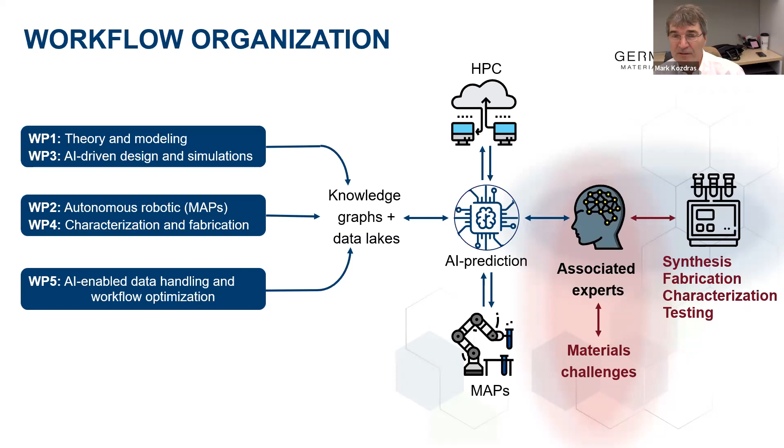Next slide, please. The areas of focus — I talked a bit about the hydrogen fuel cell related and electrolyzer related stuff. That's really where we're digging in.

Challenges 1 and 2 deal with materials, the electrocatalysts themselves, and the ionic media. We move into interfaces and electrodes, expanding to the importance of putting different materials together and how they perform together, then up to porous transport media. We see this come together to make a single device that might actually generate or produce hydrogen. So we're moving from materials to the device, and that's part of the entire area of focus within GCMAC.

Next slide, please. You can see the work packages are designed on the y-axis — work package 1, 2, 3 — and how it creates a bit of a matrix from the materials challenges themselves. There are interactive activities between these things in varying degrees of work, but most of the pillars have an impact on each of the work packages.

Where we're trying to get from those work packages is to scaled-up and integrated materials. We also want to go from the individual materials challenges to optimized in terms of specific descriptors. We're looking at how we convert conventional output from characterization on these materials into something that can be used in a computational-centric world.

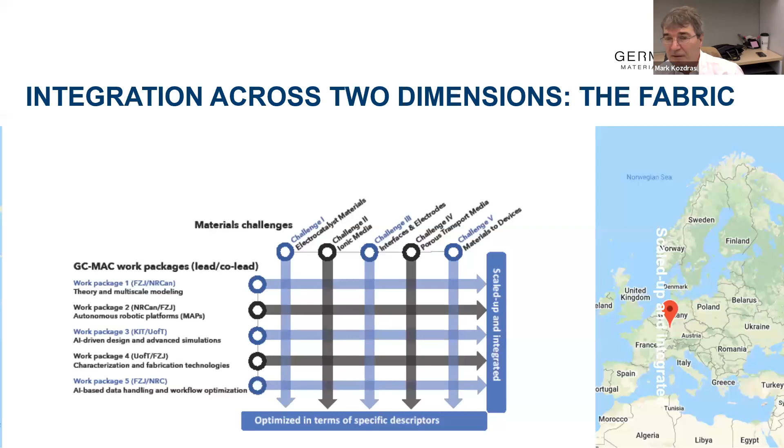Next slide, please. One thing that came up really early — this is a great graph from Michael Eikerling, the co-PI for GCMAC from Germany. He devised a scheme showing where we are in terms of applying AI-driven design and concepts on the x-axis, and then what are the socioeconomic impacts — which ones will actually drive us toward climate change mitigation and economic prosperity.

One reason governments fund these kinds of accelerated activities is because there's potential for economic prosperity from them. You can see a lot of the technologies we're working on. This isn't perfect, and people will disagree on where things fit, the importance, or the size of the bubble, but it doesn't matter — it gives us a map to say what kinds of things we could be working on that would be useful from an AI-driven design concept, provoking people to think about where it fits within their specific activity.

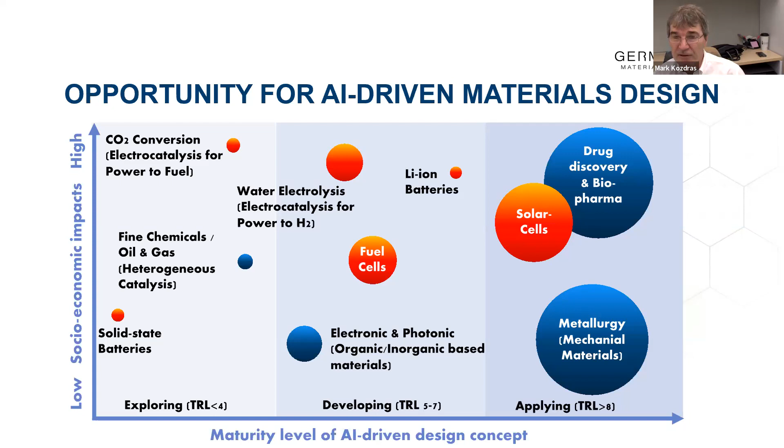The closing the loop concept is critically important for accelerated materials discovery. If you think of the current paradigm, the conventional science approach, we go through and develop an idea, we synthesize a material. We talked to some people who say they synthesize 2 to 3 variants of a material per year. It really struck us as important that we need to accelerate that kind of activity.

The device construction takes further time. The testing and characterization requires moving samples from lab to lab where the equipment is, and that paradigm has to shift. Closing the loop allows us to predict and screen materials we want to work on, then put a smaller set of materials into a loop that allows us to synthesize, characterize, learn, and repredict the next experimental plan. Some of the things we do is look at massive experimental spaces.

We learned that yesterday in the talks that came up. But it has to be emphasized that we're trying to look at experimental space that we wouldn't normally tackle in a conventional science manner.

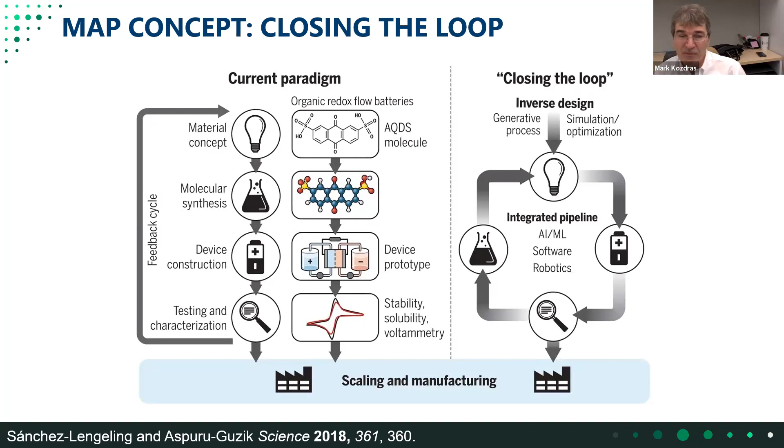What are MAPS? We definitely have the AI core that we build up on. We have computation and robotic automation, which is very important, and then closing the loop. The human in the loop is one of the important things—that expert guiding the design of the initial campaigns, these large experimental spaces, is critically important. So we're not taking the human out of the loop, we're putting the human in the loop to constrain the robotic platform to function at its peak.

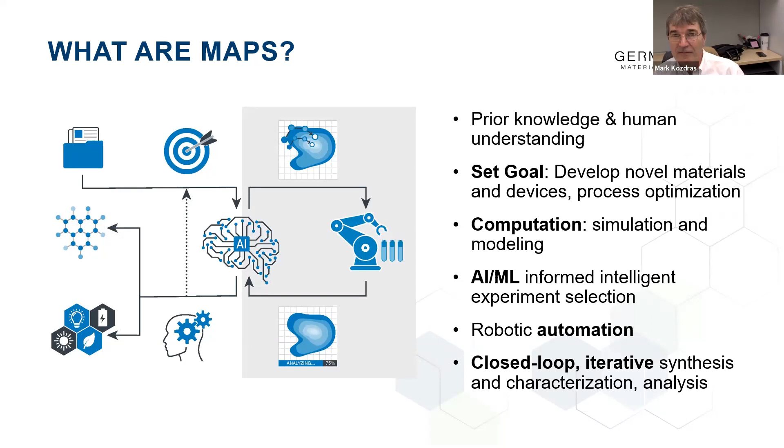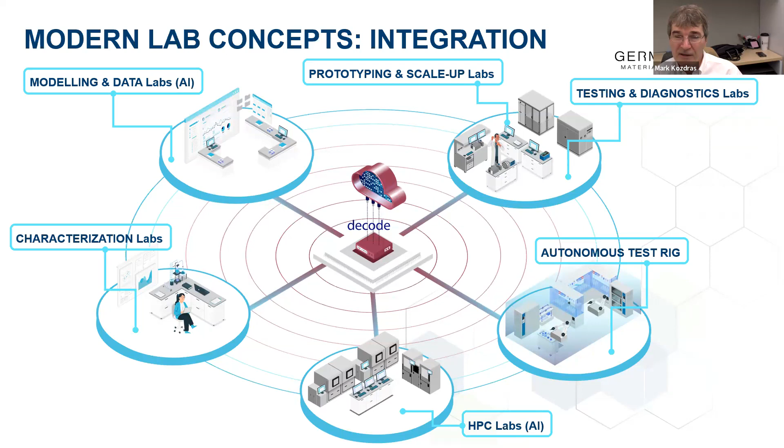If you look at some of the conventional approaches, we might do modeling in one lab, prototyping in another, some autonomous test rigs. Maybe there's high throughput characterization and synthesis happening, but it's largely done in individual labs. When we move to the model we're looking at, we're collecting and connecting all of this, and it's really important that we have means to deal with that.

Thank you very much, Mark, for your introductory remarks and for presenting very well what is the scope and activities within GCMAC. I will continue the story. The last slide already introduced one aspect of the discussion we're going to have today about integration—looking at lab-to-lab integration, basically. Labs with different capabilities, different instrumentation, different analytical abilities must be integrated and coordinated to draw the best possible value out of that existing infrastructure.

There are different aspects to that integration theme—scale to scale, component to component integration. What I always liked very much about the field of electrochemistry was that it has influences from many different areas: fundamental physics, chemistry, of course, material science, and a lot of engineering. Each of these is very essential to the developments we have to make in hydrogen technologies and other technologies like energy storage and batteries.

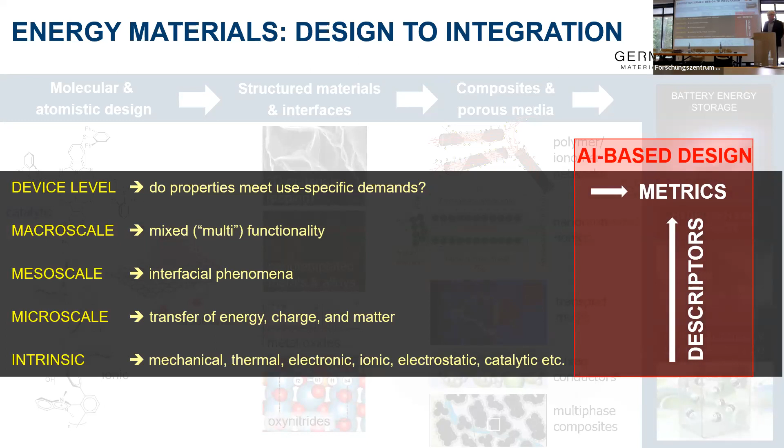So that's basically the integration that needs to happen. Now I want to show you something, we have been dealing a lot with fuel cells. Of course, one may analyze different technologies, for instance perform an analysis for battery technologies, for water electrolysis, and so on, whatever is in our interest.

So we have a very good understanding of what determines the mass activity, and we know that mass activity is a very good metric for the performance of a fuel cell. It tells us what is the current generated at a certain potential at a certain time—let's say the fresh cell, the cell after some use, so that would be reflected in the time—divided by the initial loading of platinum. So this is cost. This is performance divided by cost, so that is a good descriptor.

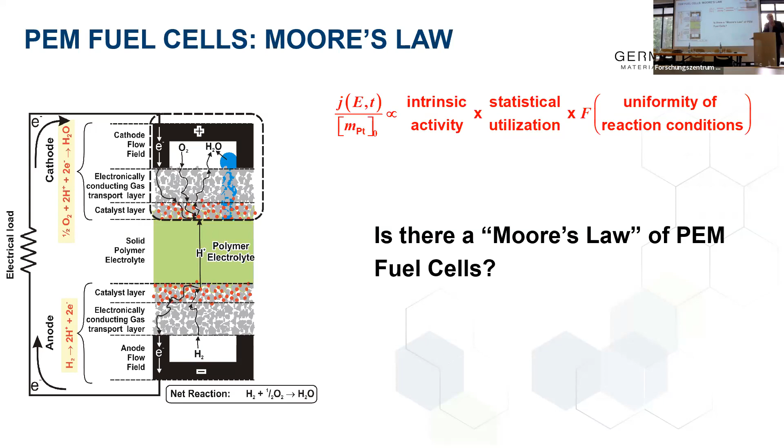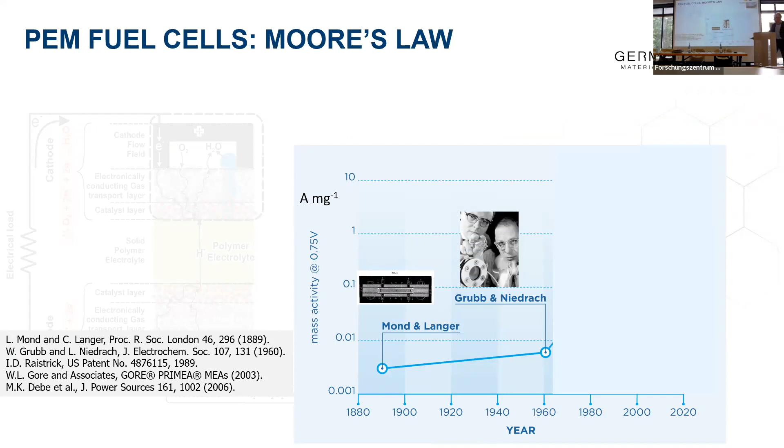And we can take a look at how that has evolved over time, over a time scale of more than 100 years. The invention of fuel cells goes back even further, but there was a first practical cell around the 1890s. Then there was not a lot of development, not a lot of progress. There was a major breakthrough here—I will tell you later what that was. And from then on, the development has been very rapid.

What people might not be aware of is there's kind of a 10 to 3, so 3 orders of magnitude increase in this metric. And all of this was not achieved in a very orchestrated way with a lot of involvement from industry. No, all of this has been achieved with academic research, academically driven research supported with public funds. So imagine how much more rapid this might have been if industry had that commercial interest in the technology from the beginning, as it had, for instance, in computing.

So 10 to 3 increase—what has driven that? Well, you might think there's an issue with the electrocatalyst material, because electrocatalysis is what we must accelerate, right? So that has to get better with less platinum, since platinum is a major cost issue. But actually none of this has been due to the replacement of platinum—it was achieved with platinum.

The major breakthrough was that polymer electrolytes were introduced as the electrolyte medium—membranes like a plastic bag with some ionic functionality in them—making these cells much higher performance. Then there's been some progress in catalyst layer design, designing the media around the catalyst, not the catalyst itself. And then some optimization of nanostructures—small is good because it gives higher mass activity in this case—and some optimization of the engineering. So that has contributed. The 10 to 3 increase came from a variety of contributing factors.

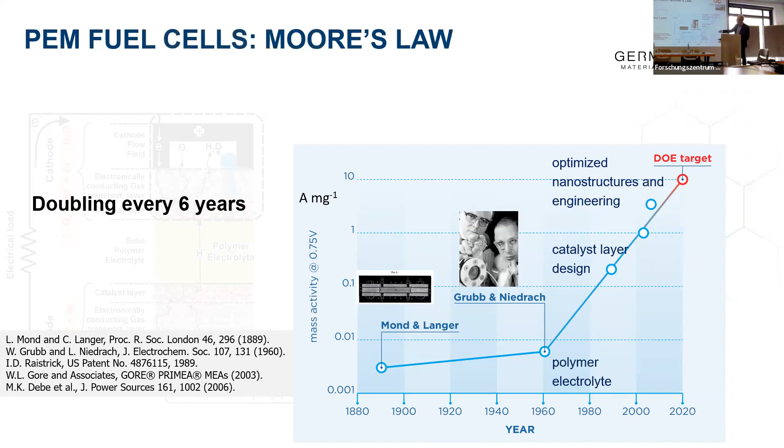So this has to be achieved in a shorter time, and the acceleration needed is indicated here. I mentioned this was doubling every 6 years—it's an exponential law, as shown here on the logarithmic scale, spanning 3 orders of magnitude. If we want to achieve this goal faster, we have to make this doubling happen every 2 years. That's where the acceleration will be needed.

So we have to see where that acceleration could come from. Maybe we continue with the platinum-based catalyst, or maybe we look at other ways to achieve performance increases—they might come from these different areas indicated here. That's something we'll have to see, but everything here we need to have on the radar.

We cannot neglect certain scales and just focus on one particular aspect. The catalyst is important, the ionomer material or media are important, the design of complex electrodes is important, integrating everything into a well-functioning cell and optimizing the engineering problem—all of this has to come together.

It's not enough to be very good at making better catalysts. Once we scale it up and make an MEA, some of these improvements will be lost. Going from the MEA—the functional unit with all the properties of a working cell—to the stack, which is essentially the end of the technology's development, we might lose even further. So we have to be really good and selective here, to retain some of these improvements when we get to the real technology scale.

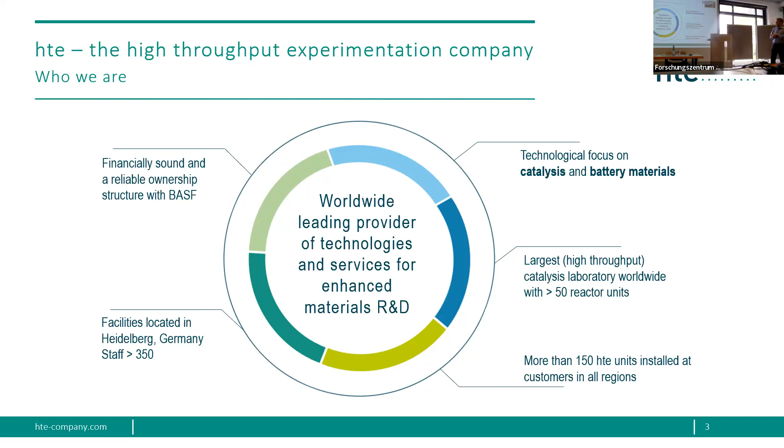What are we doing actually? We have two pillars. One is building high throughput experimentation or lab equipment - we build it for customers who buy this equipment and use it in the laboratory, or we build it for ourselves and do contract research in catalysis and materials R&D. So those are the two pillars. Also, if you buy things from us, we have operated them ourselves, so we know how they work - we typically call them turnkey ready systems because we know that they work.

The third pillar, kind of small, is the software part, which is essential for high throughput experimentation. In the early years, it was only to service the hardware as well as the contract research, but over the last years we see more and more interest in it itself, having its own selling point, and we'll see where this drives us.

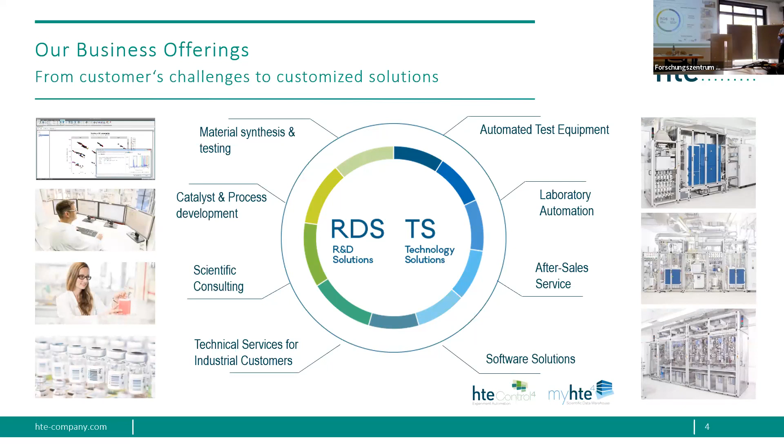The areas where we are active - the very classical one is heterogeneous catalysis, classical industry. Over the last years, however, we also realized we have the capability to look at different areas. One is battery materials, and the other is electrolysis. I will show you later why this one actually fits very well to us.

Let's have a look at battery materials. I have two case studies - battery materials and electrolysis - to give you an idea of how we think about high throughput experimentation on the material acceleration platform.

I have to say, we are a private company. That means we have to make revenue, we have to make profit in order to finance our developments and our growth. Otherwise, I think BASF would shut us down if we are not profitable.

So how do we think about battery materials? In general, our thinking always starts with workflows - you probably hear that every day in our facilities. That's the starting point, and with battery materials it's the same. Here's an example from cathode active materials, where we start at the synthesis part, then go to the thermal treatment part, to the post-treatment part, and then to the cell testing.

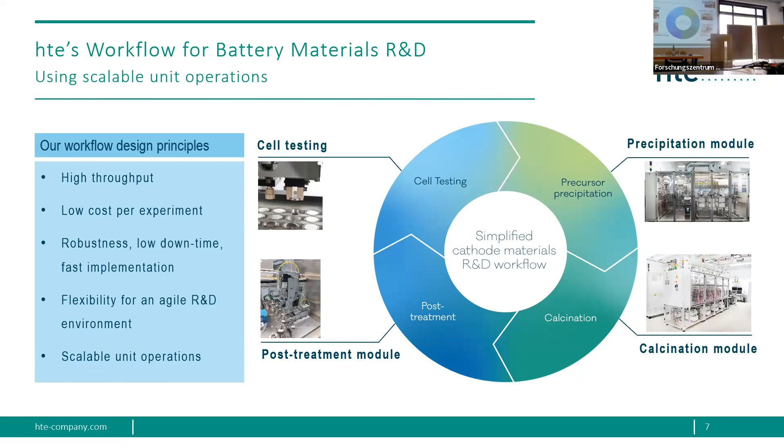So when we talk about this workflow, it's of course about high throughput, meaning how many samples do I generate with each step, and how many samples do I have to treat afterwards. It's kind of a funnel - it starts with a few samples, and since the parameters you can change, you want to investigate up the road with each step, so typically the number also increases in that direction.

The first thing starts with, in this example, synthesis and precipitation of active material. Here it's not necessarily about a very high degree of parallelization, so it's not about too many samples, it's more about scalability, meaning the samples we produce need to have some industrial relevance. That means they need to be comparable also when you go to industrial production. That's the most important part here.

But of course, automation and 24/7 operation is always something all our units are focusing on. Analytics, of course, where needed.

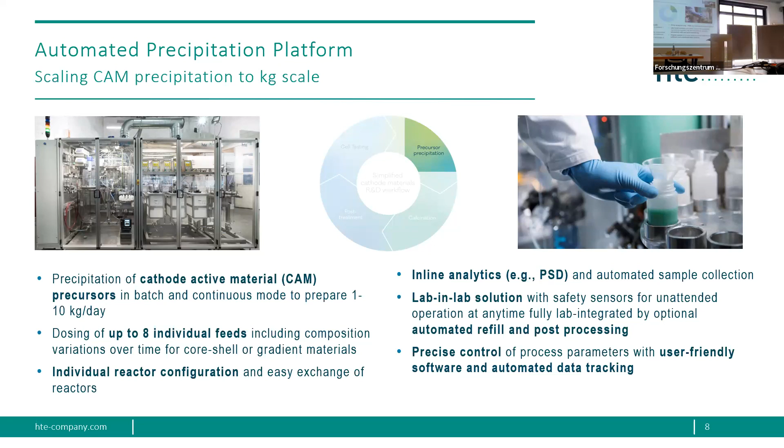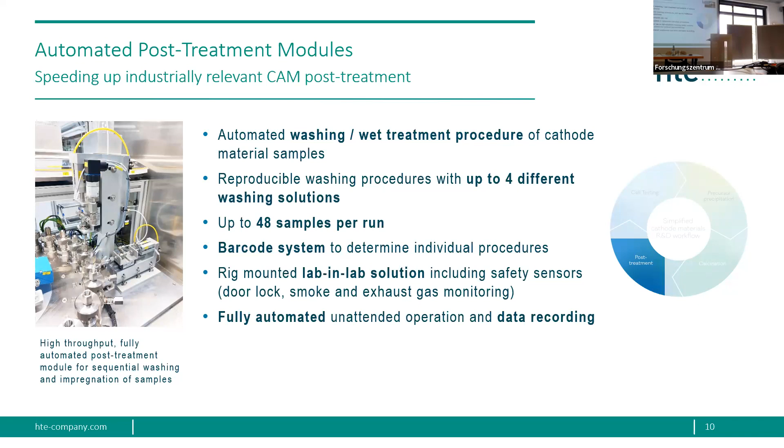The third step is then, with the number of samples increasing further, post-treatment of these samples. Here it's really about full automation and parallelization in order to cope with all the samples and the parameters that increase further. And the fourth step is then when you go to the cell testing of the material.

Here in the end, when we look at this cycle, it's the cycling, the number of channels that you have, that will be the limiting part. And then in the end it's often an economic situation or economic point—how many channels do we want to afford? It's about 1,000 channels, it's about 1 million, plus minus. And then also, how long do we want to cycle your systems?

So here it's about, when you go this way, you need to consider how many channels you have, how long your protocols are, and then you decide what you can do in the single steps. And then you decide which of these steps are maybe critical in the workflow, and that's where we typically go into automation. As I said before, we typically do not start with full automation of this at the very beginning.

Yeah, so that's kind of the thinking where we are in the battery field.

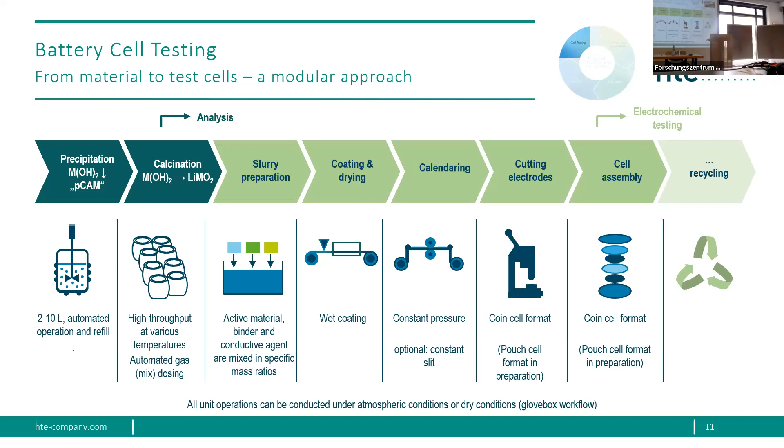Now, the second example is electrolysis. This is, of course, a very important topic, as we have heard. We realized we have to go into this topic because, let me just say, for the batteries, it was clearly the starting point was the asset for us, that's for sure.

In this electrolysis field, we looked at the typical high throughput equipment we build. It's very classic—you have an electrical cabinet, an analytic section, gas liquid supply. It's a lab solution typically, so you have ventilation, sensors, and so on. And the core thing, here you have the conversion unit—let's call it conversion module. And what is our typical way?

We use flow reactors, heterogeneous catalysis. That's kind of 20 years we're doing heterogeneous catalysis. We realized when you go to different conversion technologies like electrochemistry, where you have no tubes anymore, but cells, in the end, if you look from a generic point of view, the system that you need is more or less the same. Actually, we can take a lot of the stuff we've already learned here and what works well here. In the end, simplified, we just have to exchange the core part of it.

And that's kind of where we realized, point one, it fits our technology platform—so it's not that we start at zero, we have our level, we have 20 years of experience with this kind, and we just have to add this part here. The second thing is very important for us, and the third thing, with all the startups and all the announcements on what we need industry-wise, there is a lot of need for testing on the materials, as Michael just said. So that was kind of the motivation why we went in there. We had a good starting point, and it was an interesting field for us.

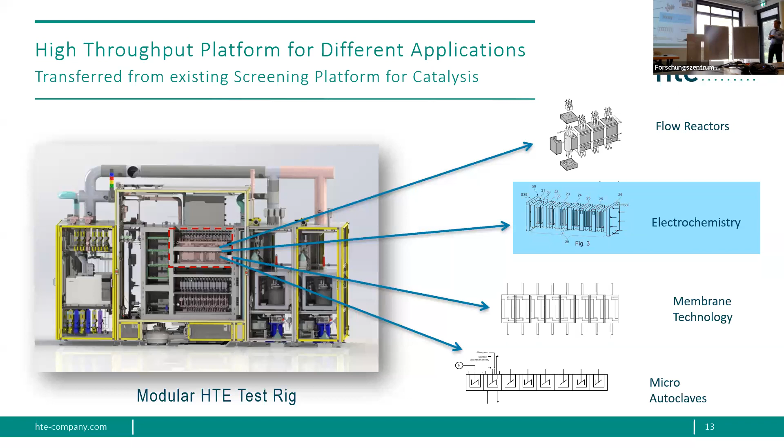So that's for the hardware part of it. Here's just a slide from Professor Eichel's group in Jülich. They did an estimation for themselves, bringing them to the point that they realized they need high throughput equipment for testing.

When you do simple material testing, catalyst testing, you can do it in a simpler way. However, if you want to go on the cell level, component level, and also now that this technology is being commercialized and brought into operation, we learn a lot of stuff. We need to include long-term testing, long-term studies. We need to compare materials at the cell level. So that's one point - a number of variables need to be tested, and the duration is increased.

From just a few hours to maybe long-term tests of 1,000 hours. When you have this in focus, you realize that the electrochemical part - the experiments, the planning, the synthesis, testing, evaluation - is by far the most repeated step from a timing point of view. So if you do it with single systems, it just takes too long. So here it's really about going parallel and doing automation in order to bring down this time.

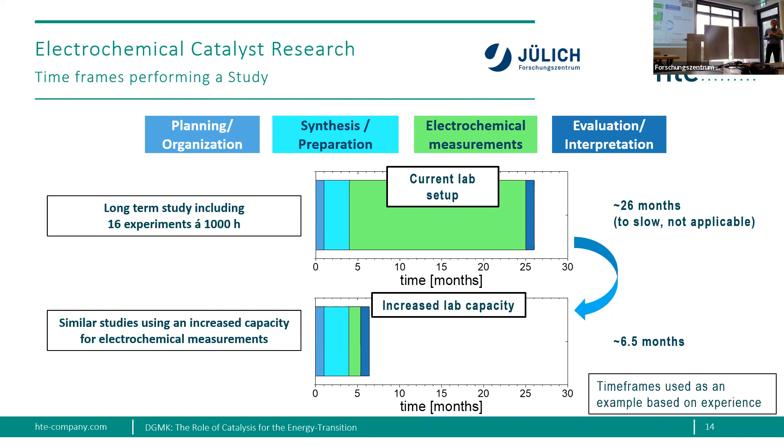This is an example of a 16-fold unit. So that's kind of the motivation. You could also say that's a business case for buying such a unit in the end.

This is how such a unit might look like. We are always thinking modular, as you've seen in the intro slide. We have certain modules that we combine into certain solutions, creating a customized solution. It's always more or less the same - the unit looks a little different from one another, but in principle, in how it's put together, it's always the same unit operation. That's what I call a modular construction kit.

Here's an example where you see it's actually a 16-fold unit. However, it's modularized, meaning it has 4 modules - 1, 2, 3, 4. Some are analytics, gas liquid, some gas conditioning, electrical cabinet - but in the end it's 4 of these modules with 4 cells each, and that can be combined in a flexible way.

I said before, the infrastructure around it we already know. The electrochemical cell is not our core competence, so as we heard yesterday, it's not always the best idea to reinvent the wheel, but just to look for people who can already do it. Here we work together with Fraunhofer. We realized the cells on the market do not fit our purpose, so we had to do our own design.

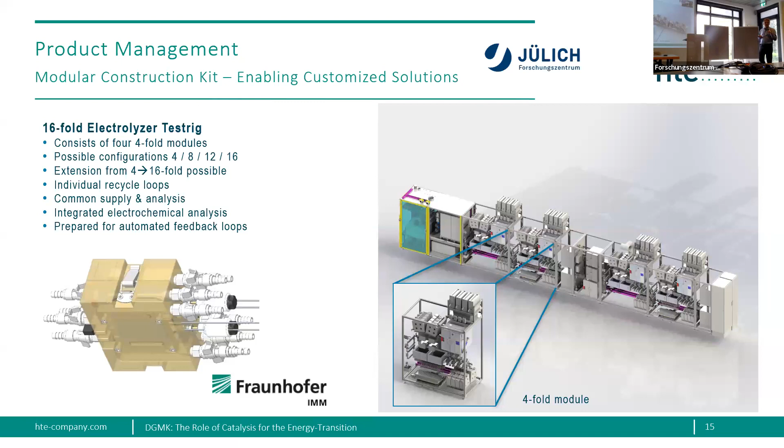A very important part for us is that this unit operates 24/7. So a critical part for us is software, the automation of these systems. Here again, we call it software workflow or data workflow. It's very important for us that we can control the unit in an automated way. That's a very classical recipe editor for the programming.

What was new for us, since electrochemical equipment was new for us going into this field, is that we worked together with Metrohm to integrate their software, the Nova software, into our software, so we can parameterize their software from ours. So as an operator, you just see our HTE Control, the unit control software, and we are controlling the Nova software underneath. That makes it quite easy for handling.

An important thing that I actually like a lot about electrochemistry is its analytics. It's online analytics, so you can directly build it into the unit and operate it on stream. I'm coming from the refinery area - we always had to deal with oil samples. You couldn't do the analytics in the unit, so you had to take it out and bring it to the laboratory, or you had a huge effort to automate this into the unit.

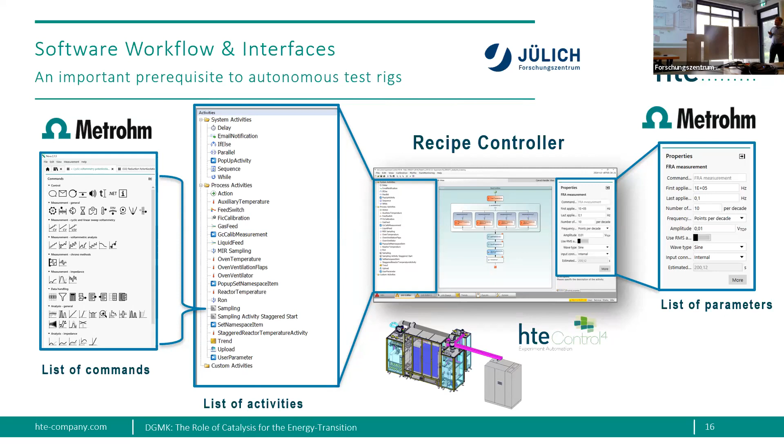So very important is software workflow. Without software, without data, without the proper data workflow, no high throughput experimentation properly works. That's kind of described here. If you talk to us, we're always talking about this workflow. We have two software packages, the unit controls and the database, and they work together. In this way, within these two systems, we can do the planning, documenting synthesis, documenting the testing, also the analytics and data evaluation.

Now, finally, two slides where I looked a little bit over the last 20 years, what we have seen—and this is just our point of view, not more, not less—how we look at high throughput experimentation, or also this acceleration platform. The most important part is that the data are flowing in an efficient way, however you do it. And what we see is one size does not fit it all, especially if you are in the research part. Things might change, steps might change.

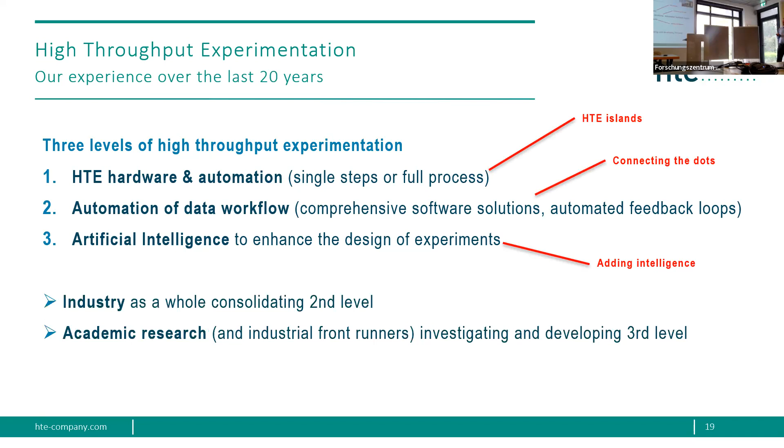And if I look at it, what we see with our customers—again just our view—what the industry as a whole is working on, the first level is more or less done. A lot of people have automated systems, but this connecting the dots is kind of consolidating on an average level, I would say. Then you have especially academia and also industrial front runners that are actually working on this third level. That I would just summarize where we are right now. And for us too, this is not the state of the art yet, but it's a very important topic for us as well.

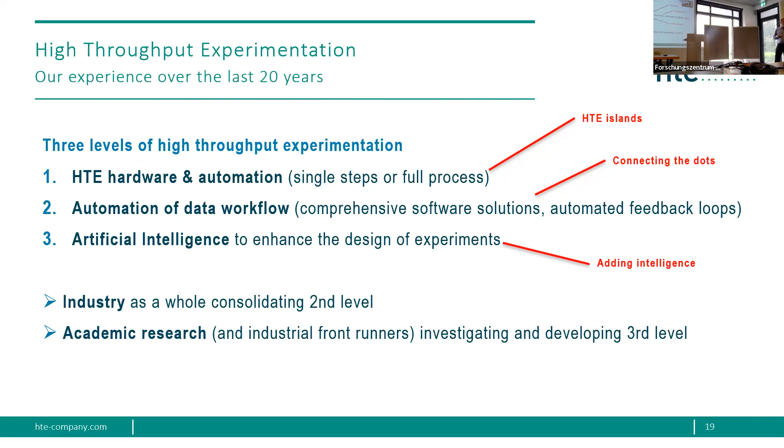So, yeah, I think we fit quite well into this thinking of material acceleration, and especially the topic where we actually bring intelligence, artificial intelligence, into the process. So that's my view, or company view, on this topic. Thank you very much, Florian.

Very nice perspective and stimulus for the further discussions that we are going to have. Florian is also part of the panel, but if there are some questions now that you would like to ask him, you can take it.

In terms of acceleration, that you can accelerate along the characterization part. You show the slide on materials and it follows this part where you show that thanks to your high throughput experimentation, you can shorten a lot the time of development. If I'm not mistaken, when you show the slide, there is not a shortening of the period of the synthesis. Yes, that would be—I didn't say that.

When you have managed the biggest portion, the next step is certainly the synthesis, and some people are focusing on the synthesis. From our point of view, especially when you want to go to long-term testing, this is really the bottleneck, as I said. But if you have solved this one, then of course you would look to the next part, and that's clearly synthesis as well, because a machine that is running needs to be fed with samples. So clearly automating synthesis is also a very important part.

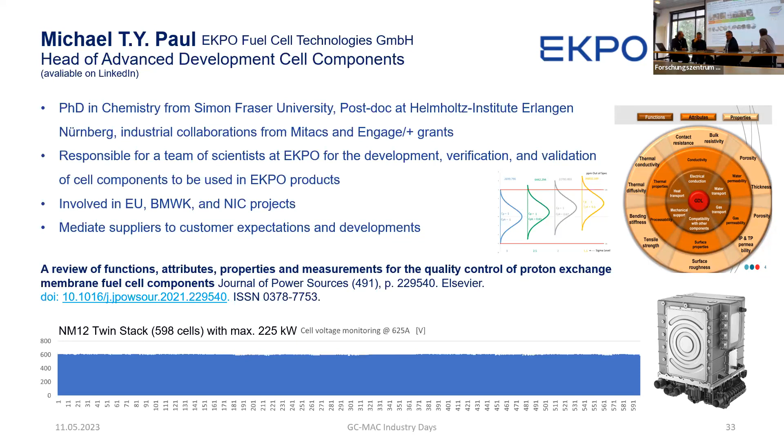Yeah, actually, you can show everything. I forgot to remove the animation parts.

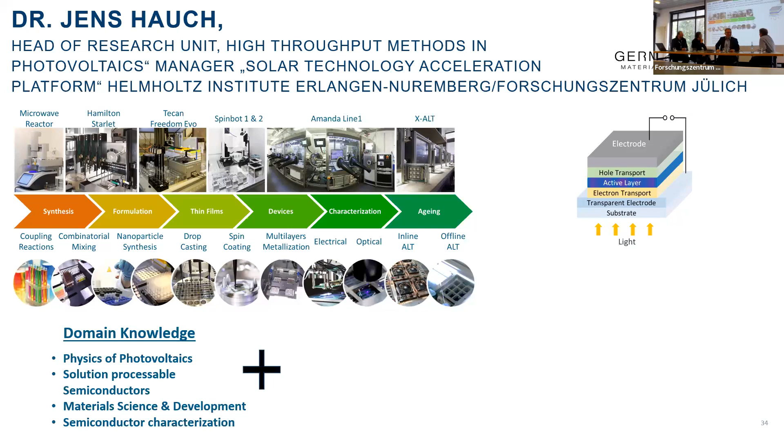So my name is Jens Hauch. I'm head of the research unit High Throughput Methods in Photovoltaics at the Helmholtz Institute Erlangen-Nuremberg. We recently won a large-scale grant from the Helmholtz Society for creating a technology acceleration platform that's about transfer activities with industry, where we're trying to go from the idea of a materials acceleration platform to getting all the way to a technology that's in the market and actually being sold. That, of course, involves a lot more, because you need industry players along the whole value chain to support you there.

When we talk about high throughput methods in photovoltaics, what we're thinking about is that we are classical material scientists. What we develop is solar cells, photovoltaic cells. We have the classical know-how in semiconductor physics and analytical techniques that come from material science. Several years ago, we started taking this domain knowledge and wanted to put it together with modern methods that are more and more available — these are robotics, data methods, artificial intelligence. And we wanted to bring those two together.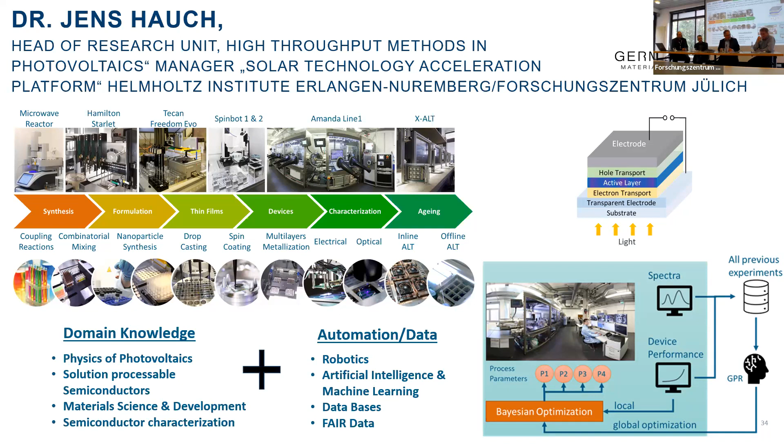Hello everyone. I'm from an integrator company from Germany. We supply lab automation products since 1990, and we have a heritage of supplying chemist application-oriented automation products, as well as, in the last few years, biology-related products. I see myself as a lab automation consultant. We supply customers with solutions for labs to carry out the initial synthesis in the corresponding field of yours. We prepare the projects, but we are not really involved in the research on the materials themselves. So my focus is definitely only the engineering part, and that's my topic, which I could give input on today, with similar examples to what my first two colleagues already gave.